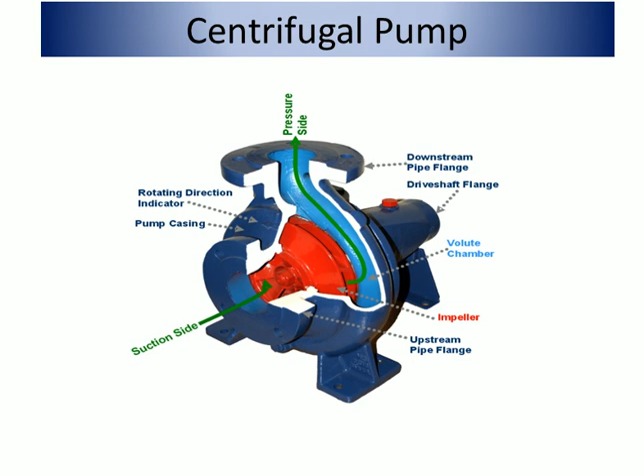The working principle of centrifugal pump commences when the electric motor starts and the shaft of the electric motor, which is connected to the impeller, also rotates and suction is created over the eye of the impeller. That means pressure at the eye of the impeller is less than the atmospheric pressure. Then water from the sump, which is at atmospheric pressure, rushes suddenly to the eye of the impeller.

Physical contact takes place between the rotating impeller and water, which causes vortex formation and centrifugal action, which leads to water being expelled tangentially into the delivery pipe. This water has higher pressure than the water in the sump. In this way, water is delivered from low pressure to high pressure at the overhead tank. Now we will go point by point.

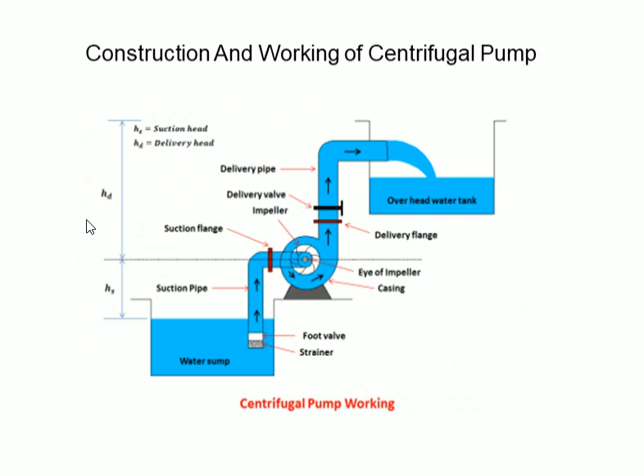The first step in the operation of a centrifugal pump is priming. Priming is the operation in which the suction pipe, casing of the pump and the portion of the delivery pipe are filled with the liquid which is to be pumped, so that all the air from the portion of the pump is driven out and no air is left. So for removing the air from the pump, priming is a very important step.

The necessity of priming of a centrifugal pump is due to the fact that the pressure generated at the centrifugal pump impeller is directly proportional to the density of the fluid that is in contact with it.

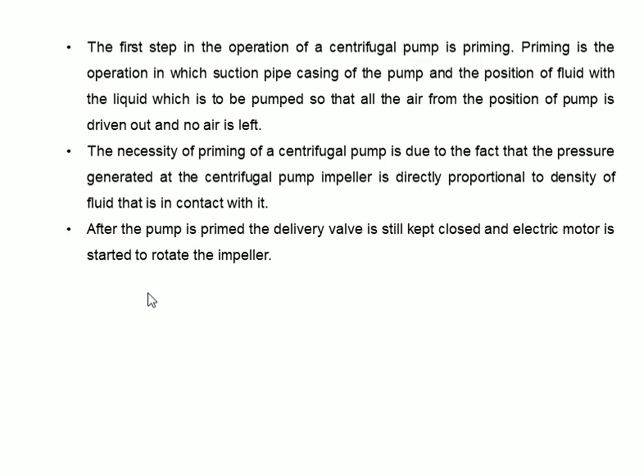After the pump is primed, the delivery valve is still kept closed and the electric motor is started to rotate the impeller. The delivery valve is kept closed in order to reduce the starting torque. When the valve is opened, the liquid is made to flow in an outward radial direction, thereby leaving the vanes of the impeller at the outer circumference with high velocity due to centrifugal action, and vacuum is created, as I explained in the previous slide also.

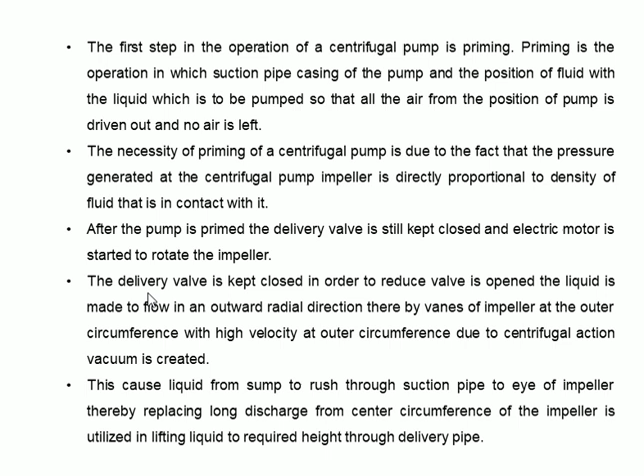This causes liquid from the sump to rush through the suction pipe to the eye of the impeller, thereby replacing the liquid being discharged from the circumference of the impeller, which is utilized in lifting the liquid to the required height through the delivery pipe. These are the main parts of the centrifugal pump.

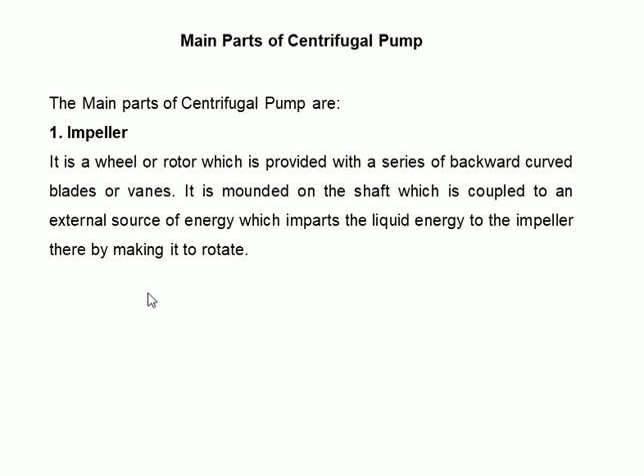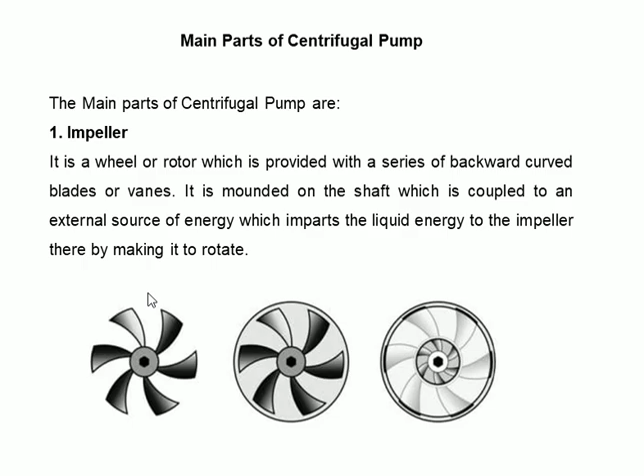First is the impeller. It is a wheel or a rotor which is provided with a series of backward curved blades or vanes. It is mounted on the shaft which is coupled to an external source of energy which imparts energy to the impeller, thereby making it rotate.

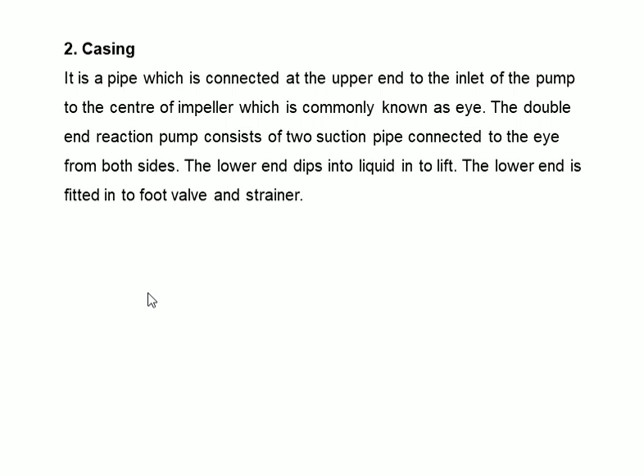Second is the casing. It is the pipe which is connected at the upper end to the inlet of the pump to the center of the impeller, which is commonly known as the eye. The double suction pump consists of two suction pipes connected to the eye from both sides. The lower end dips into the liquid to be lifted. The lower end is fitted with the foot valve and the strainer.

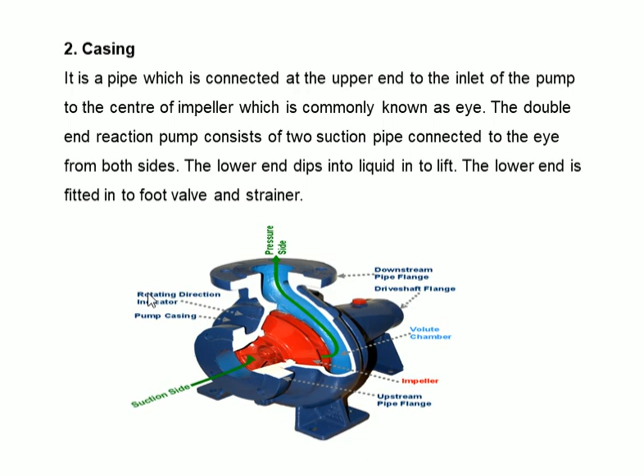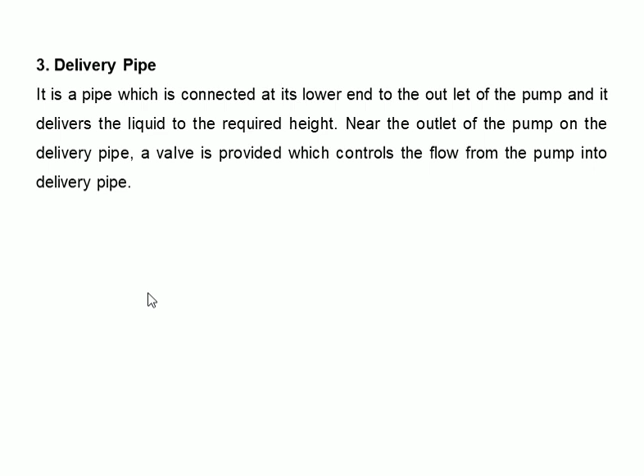Third is the delivery pipe. It is a pipe which is connected at the lower end to the outlet of the pump and delivers the liquid to the required height. Near the outlet of the pump on the delivery pipe, a valve is provided which controls the flow from the pump into the delivery pipe.

Fourth one is the suction pipe with foot valve and the strainer. The suction pipe is connected with the inlet of the impeller and the other end is dipped into the sump of water. It consists of the foot valve and the strainer. The foot valve is a one-way valve that opens in the upward direction, and the strainer is used to filter the unwanted particles present in the water to prevent the centrifugal pump from blockage.

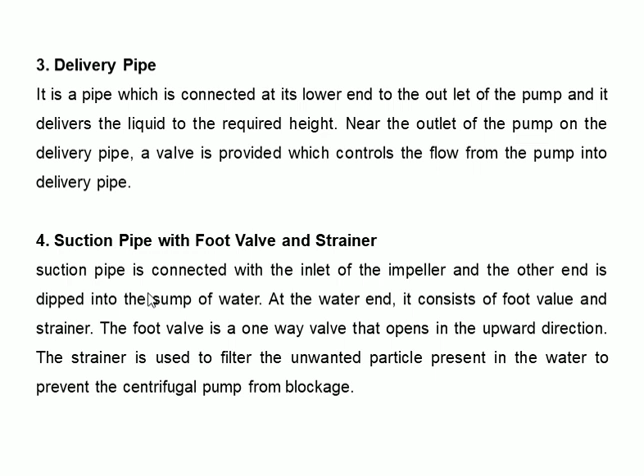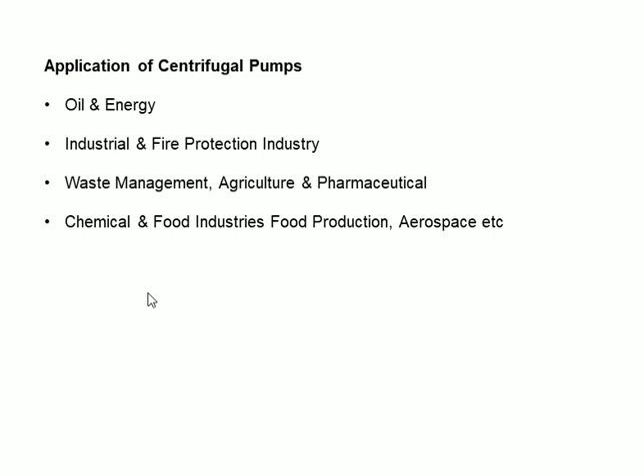Applications of centrifugal pump: oil and energy. Then next is the industrial and fire protection industry, waste management, agriculture and pharmaceutical, chemical and food industries, food production and aerospace.